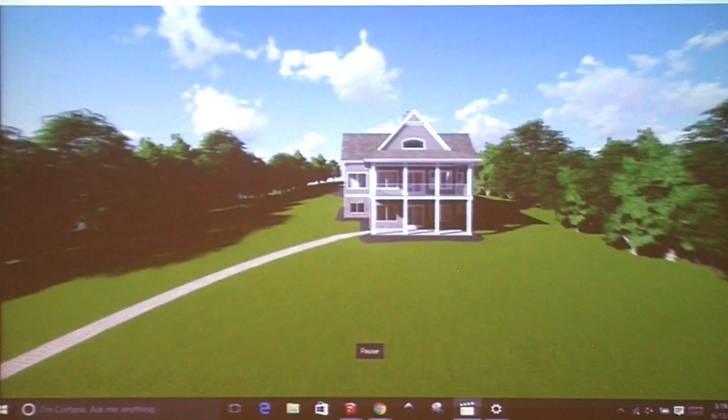And it's the method that I use to go from sort of the boring 2D stuff and get down to where I've got something I can show my clients. That's the same house model. This is a lake cottage that I created just for this, to have a sample file, because I needed something smaller. Most of my homes are pretty good size.

But everything is modeled, everything is estimated - siding, stone, gutters, downspouts, the columns you see, the asphalt, the mulch beds, even that dock coming around the corner is a component in there. The patio, the decks - you go inside, there's down to the outlets and switches in the house. So it's pretty thorough, but it is a large file.

And I also realize that it's probably farther than most of you would want to take it, and it may be kind of crazy, but it's there. It works for me.

Some of the basics before we go into it - I'm going to be talking about some of my favorite extensions. If you were in Basecamp, I was in Basecamp too, and I learned a lot. You probably saw and heard of a lot of good extensions and maybe got some on your stick of knowledge. But you'll be hearing me talk about some of my favorite plugins, and some of those guys are here that are the developers. When I got into doing this development stuff, I realized how brilliant some of the guys in this community are. So we'll be talking about some of those plugins, extensions, keyboard shortcuts.

How many of you guys use keyboard shortcuts? Most of you probably. There are some favorites that I use all the time, like hiding rest of model, so I can get rid of all the stuff around because I do a lot of groups, and if you're not doing groups and components, you should be. Paste in place, hide geometry, that kind of stuff.

Another thing is collaboration. As a home builder, I collaborate a lot with other trades so that I don't have to do it all. My surveyor will do my topo analysis. He'll go out and shoot the grades, and he'll provide me with my contour lines that I'll use with SketchUp tools and some plugins to create my site models. I use that over geolocation because it's the accurate site. I live in a lake community, and sometimes the topos are way off.

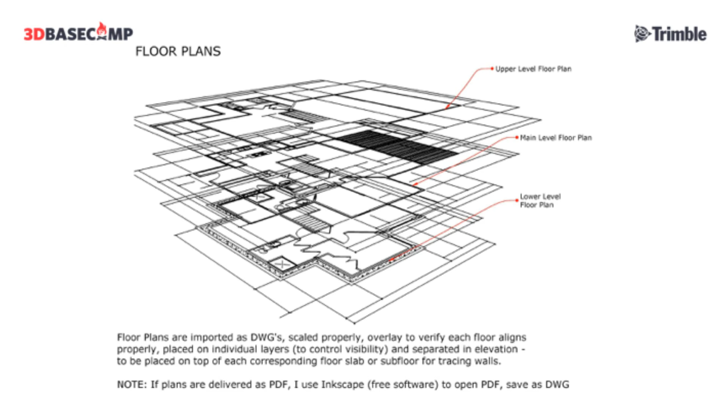Okay, so we'll jump into it. The first thing I do is bring in my floor plans. A lot of times I get PDFs as a builder. People send me, hey, need an estimate to build this house.

I'm also a designer, and if I'm designing it, I'm either designing in SketchUp or using SoftPlan, which is a parametric program. I still use it, but I like SketchUp because I get all the detail I want. But I might design in that program, then bring it over as a DWG.

But how many people have tried to get a PDF into SketchUp? All right, so I love PDFs, but I want to get it into SketchUp. In SketchUp Pro, you can import a DWG or DXF.

So there's a free program I use called Inkscape, I-N-K-S-C-A-P-E. It's a program I downloaded off the internet. All I do is open up the PDF, save it as a DWG, and close it. Then I'll bring it into a clean file in SketchUp and use cleanup on it.

I make sure I get rid of all the layers in there that I don't need, erase the geometry I don't need, and then put all of it in a group, all on layer 0. I always work in layer 0 — just don't toggle down to one of the radio buttons to work in a different layer, because you'll regret it.

You'll think, I'm smart, I'm doing all this because I'm working in this layer. Then you get a phone call, come back, and you're still doing that, and everything's on the wrong layer. You can't find it or whatever.

So I put all that on layer 0, and in my folder structure I usually save that as lower level floor plan. The next one, main level floor plan, upper level floor plan.

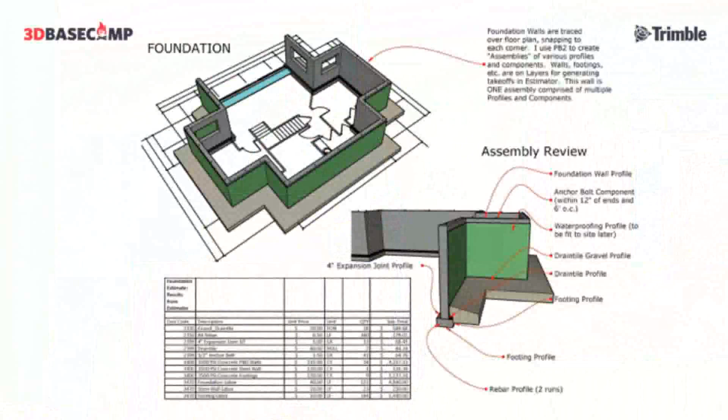Then I'll do the second floor and bring it in, and I'll separate them out by 10 feet just as an arbitrary distance to start with. Later on we'll be moving it, putting it right on the floor we're going to be working on. So after I've done that, I'll do the foundation.

I use a plugin called Profile Builder 2. Is anybody using that? That's it? Dale Martens is here, he's got his booth here. It's an awesome plugin — it's like the Follow Me tool on steroids.

Profiles can be lumber, baseboard, crown molding, it could be anything—any piece of geometry, any profile. It could be a DWG of a crown molding that you've downloaded, and then you can use that as a profile and just start tracing it around the room as you need it. Lately, the latest version has assemblies.

Assemblies give you the ability to combine profiles and components and put them into a wall assembly. Like that foundation wall you see, that's got a 10 by 20 footing, that was a profile—I've got 2 runs of rebar in there. You don't have to do that, but I did. Then there's a foundation wall, 10 inch by 9 foot, centered on that. I've got an expansion joint going around the inside, drain tile on the outside, gravel around that, and waterproofing around that which I later fit to the grade. I've got anchor bolts within a foot from the end and every 6 feet after per code, and that's just a component it puts in there for me.

What you're seeing in the back in the walkout is a stem wall—you're seeing some foam insulation there, but that's a stem wall in the back. So that's just 2 sections of geometry that were created pretty quickly because I'm literally just tracing over the floor plan.

This is where I use a method I'll call lineal groups. All the random 2x4s you're seeing, 2x6, the headers are 2x10s—all that was done using Profile Builder because Estimator will read that lineal footage. I don't care how many lineal feet of 2x4s I have in the house, I don't care how many 18¼ inch cripple studs I have. I just want to total all that up and divide it by 16 because I'm ordering 16-foot plate material. So I want to be able to get the data out of that—I want to see it, but I want to get the data out of it.

So a lot of this becomes a disciplined method, because to get the results that I need to get, I have to be disciplined about modeling it.

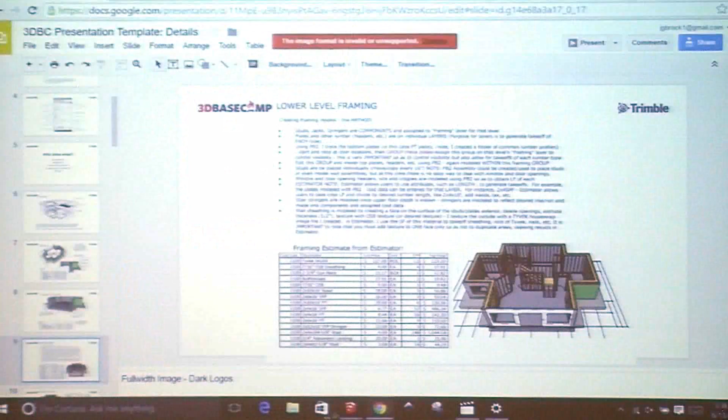So let me do a little quick thing to bring up another model here. This is a clean version of that, and this is Profile Builder over here, and this is the assembler.

Let's say I've got that foundation. Since it's open here, it's not fitting because of the screen resolution, let me see if I can scroll down. Here's a little button that starts drawing this stuff.

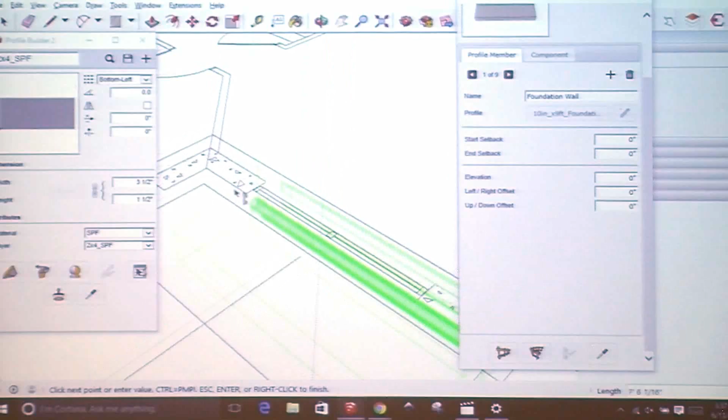So you see that one simple action of clicking to start, and you can see it being extruded as I go. I'm just going to go around the perimeter. I'm going to stop right here so I'm not taking up time. That one simple action created all of that.

So when I'm doing my framing, I'm going to pop over here off to the side. This one's ready to frame, okay? And I'm using a treated plate on the bottom, so I've got a little library over here. He gives you a whole bunch of profiles that come with it, but I created my own library for everything I use, from lumber to interior trim to exterior trim to footings and foundations. So I've got this 2x4 PT as my treated lumber.

So I'm just going to start drawing on top of it, and my laptop is seizing up on me for some reason. So the assemblies are one thing, the profiles are another, and there's two separate menus in there.

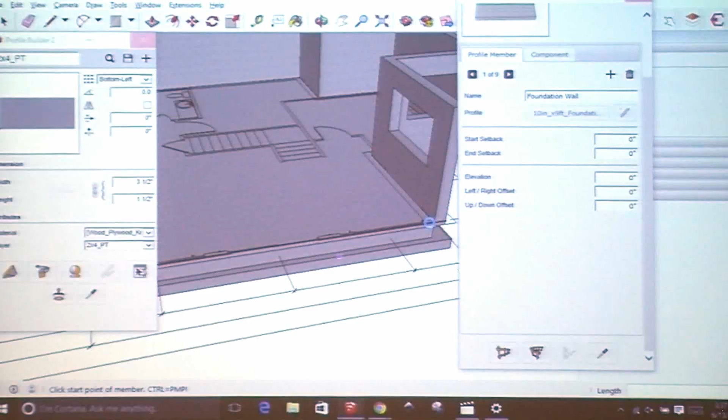But in theory, if this thing ever wakes up, I draw the bottom plates first, starting and stopping at doors. All right, then let's go ahead and do one.

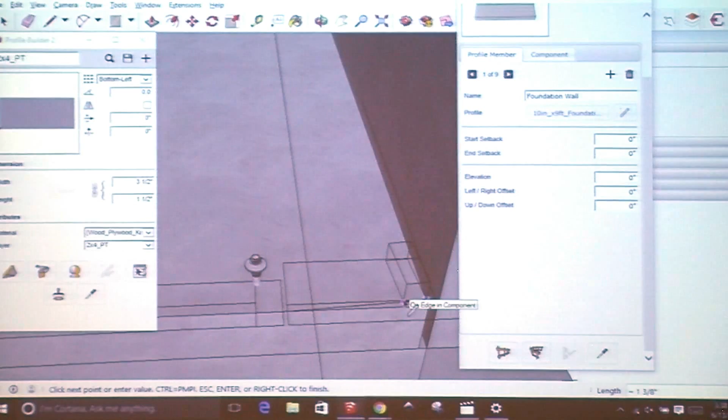I'll be flying around here with a 3D mouse, so if you see it kind of going smooth. Everybody have a 3D mouse? Anybody? If you don't, get one. I won't work without it.

I refuse. All right, so I'm going to just go and start and stop at my doorways. And you can see I got my anchor bolts in there, and I got my treated plate. It's just that easy. I'll start off on the other side, skipping where that window is. I got a door that I just skipped past.

So I'm going to then group these two by holding down Control and clicking on the two of those. Then I'm going to right-click on that and make it a group. The reason I'm doing that is because I got a whole bunch of these different lineal footage items.

And I want them on their own layer because the estimator is reading that off of that individual layer. So if you're not worried about estimating, just throw it on one layer, control its visibility, main floor framing or lower floor framing. By putting it in a group, all those layers are read individually by the estimator, but I've got them all grouped into my lower level framing.

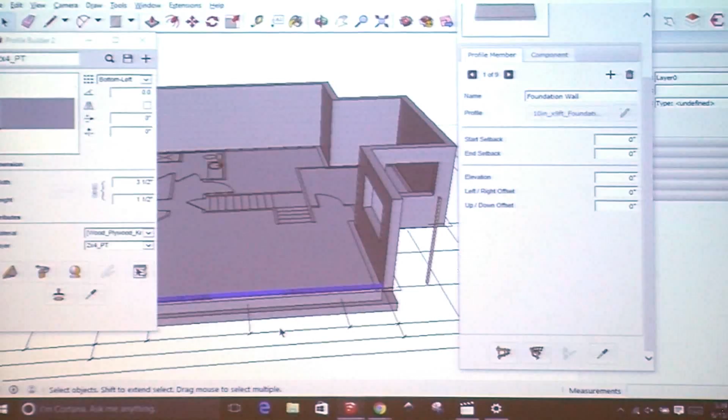So when I've done that, I'm going to double click on that group. If you double click, it edits it.

So for hiding the rest of the model, I use Shift-H. See how I can now see it close up? I don't have to worry about all the other stuff that may be behind it. This one isn't a bad example of it, but a lot of times you really need to do that so you can see where you're working.

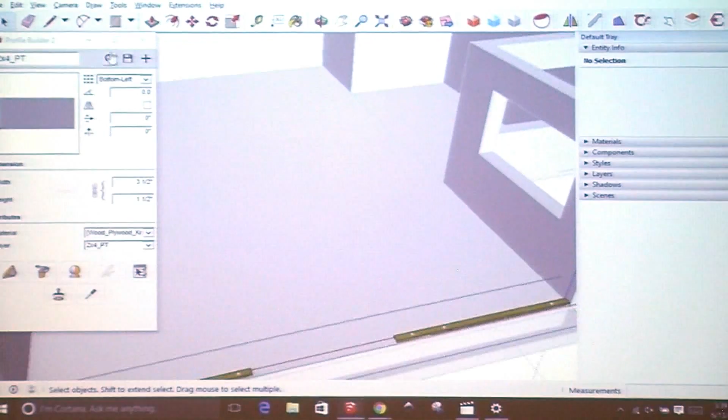Then I'll just switch over to my 2x4s, my regular 2x4 SPFs, and I'm just going to draw that right over top. Having laptop issues. So in theory, I'm going to draw that plate over top, over to the other side, and I put it right on top of this plate that's here now.

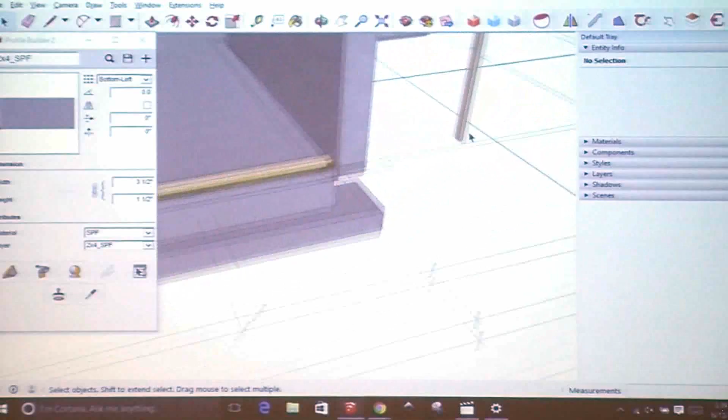I'm going to close out of that group for a second. I've got a stud. Now this stud is a component that I have in my library because it's already got my costs associated with it.

But you know, you can create a stud, just 1.5 inch by 3.5 inch rectangle for a 2x4, pull it up 104 5/8 or whatever your stud height is, triple click on it, make it a component. I like to put a little wood texture to it for realism.

And then I'm just going to move this stud over into this mix. Obviously I didn't get that plate exactly right. I'm going to double click on that group now because I'm editing the group that I just made. So I can select that plate, and I'm going to move it right on top of the top plate. While it's still highlighted, hold down Control to make a copy of that, and there's my double plates.

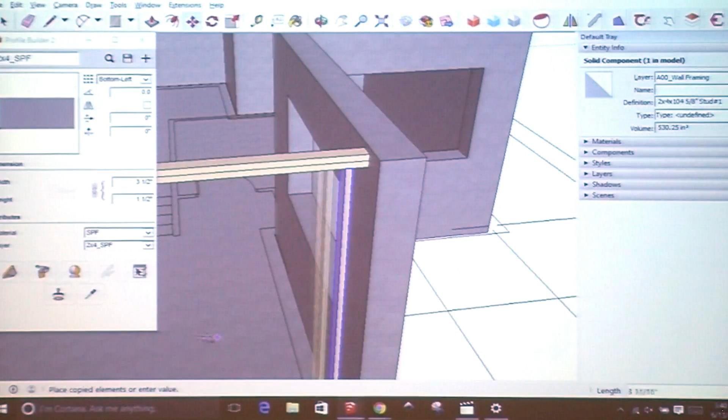And then I can take my studs and copy them 16 inches over, times 15 or however many, taking out for windows and doors and things like that. It's not a parametric modeler, and I haven't found anything out there yet. I want one. There's a thing called House Builder that's been out for a while, but it's just mass modeling, and I can't make them components, so I don't use it.

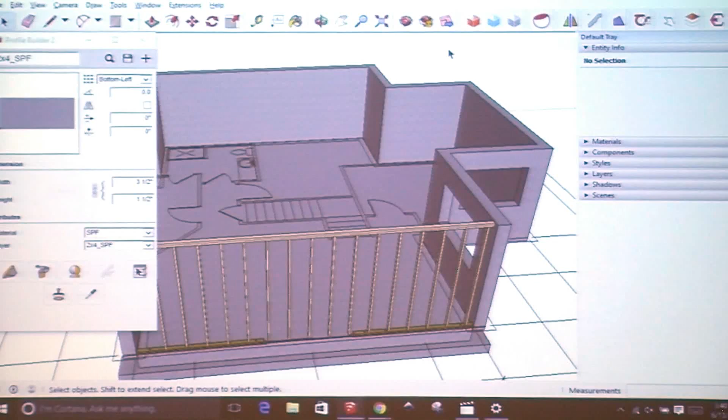You could do assemblies of these studs using the Profile Builder tool we talked about. You could actually tell studs to be every 16 inches on center and just draw from one end to the other, and it'll fill them in. So there's a lot of ways you can do it. I tend to just do these studs one at a time. I put my corners in and tees in. It doesn't take me very long to frame them once you're used to it. It may sound daunting, but it's not that bad.

So studs, jacks, the stringers you're seeing, the stair stringers - those are all components, and I assign my pricing to those. The plates are all done in that group we talked about so I can get my cost for that. So I'll go through and do all my framing on this lower level you're seeing here, and I've got all my materials off of that as well.

The main floor system in this case is TJIs. Most of the time I'm using floor trusses, but for this simple small model I use TJIs. TJIs are truss joists - you've got a top chord and a bottom chord and a web stiffener.

You can model those in SketchUp by simply modeling your own and push-pulling them, or you can use Profile Builder and do the top and bottom profiles and the web profile and draw them. So the perimeter was done with a rim board - that's an actual TJI rim board going around the perimeter.

And then the joists I'm putting in here, I put them in, actually measure them, and then name them by their length and copy them. The reason I measure them is because if it's 14'6", I need to order 16-foot material. If I just give my lumber yard total lineal footage, I don't know what I'm going to get.

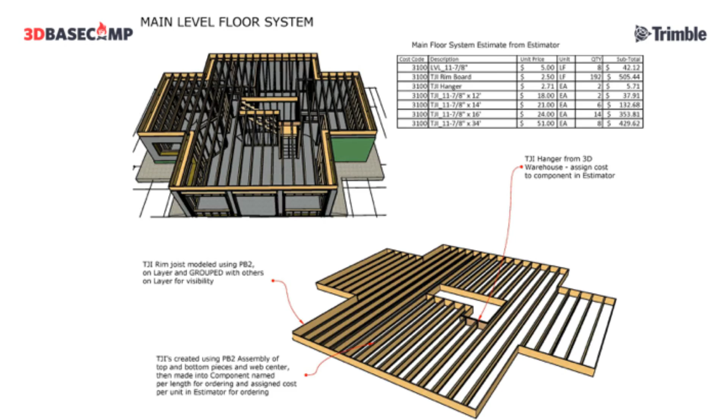The next thing I do is my subfloor, and all I'm doing there in native tools in SketchUp is taking my line tool and drawing a perimeter, just like I did with that slab. I'm literally just tracing that rim joist I had in there to create a face. But before I pull it up, I cut out for that stairwell.

You've got a stairwell in there, and I don't need flooring there because my stairs are going down. So I'll literally trace my stairwell and delete that face. I'll even go in where the toilets are - the toilets are in on the drawing. I'll offset from the back of that wall.

It's 12.5 inches to the center of a toilet drain. I'll offset with my guide tool and tape measure tool, pull it over 12.5 inches, then do another guide coming from the side wall to the center of that toilet, and draw a circle. I usually do a 4-inch diameter, 2-inch radius, and trim that out, because if it's sitting over top of a truss, I'm going to have a problem - you cannot cut trusses. So I'd rather lay that out now, and if you're an architect, lay it out so your guys aren't doing that and then having to cut trusses and get in trouble and that sort of thing.

So I work my floor systems around that. I'll do my floor system first, but then go back and tweak it. And if I'm working with my truss manufacturers, I let them know of those center lines to make sure they space them properly. Then once I've got that face, I pull it up 3/4 of an inch because I'm using 3/4 inch Advantech subflooring in my market. Triple click on it.

I give it that nice wood texture, that OSB kind of texture that SketchUp has in it, and put that on my layer called subfloor. Then my pricing is associated with that subfloor. So in Estimator, I'm using the area of that subfloor and dividing by 32 for 4x8 sheets.

So that's my subfloor. Then I'll take that main floor plan and stick it right on top of the subfloor, just like I'm chalking the walls. When I go to my main floor, it's the same theory. I'm using those groups, lineal groups, where I'm doing my 2x4s and 2x6s and 2x10s, all my random lumber, studs or components like we talked about. The sheathing you're seeing there, the exterior sheathing, I'll pop into the model.

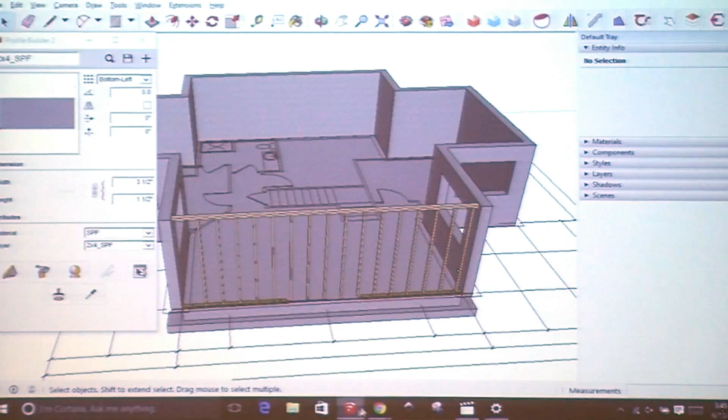Let's get to the correct one. Let's go into the basement framing here. I'm dropping back in. I didn't show you before, but you can see my stair stringers are in there.

They're components. The sheathing that I put on there, I literally just use the rectangle tool and create a face from corner to corner. I'll draw a rectangle across it to create that face. I'll then trace the window openings and delete that face that was created. I'll trace the door opening and delete the bottom edge that was down at the bottom, and then that creates a hole in each of those cases.

So then when I've got my sheathing, there's a couple different ways I'll do it. Sometimes I'll go wall by wall. You could always do all those faces and then use a plugin called Joint Push Pull. Is anybody familiar with that? It's a separate plugin you can get, free like most of these things that seem to be free. You could pick multiple faces, choose the depth you want to pull it, and it pulls them all at the same time. So I use that on my roofs, and we'll talk about that.

So I'll pull that sheathing out a half inch. And I usually will triple click on it and give it all that OSB texture like I'm using, because I use OSB sheathing, and put it on that group called sheathing so I can control its visibility.

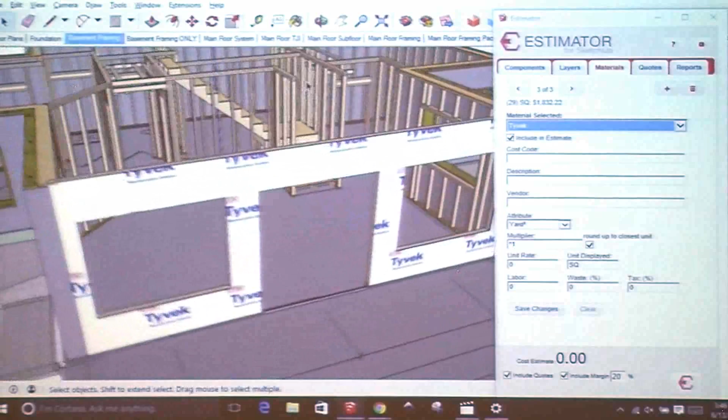But then I picked up this Tyvek image off the internet because I wanted my clients to know what this thing is going to look like. And in Estimator, that becomes a material. So if I clicked on that and chose the material, you get a drop down of everything in that selection. Tyvek, you can see I've got all these different costs associated with it. I'm using its square footage to figure how many sheets or rolls of Tyvek. I'm using its square footage divided by 32 for how many sheets of sheathing. I'm using its square footage divided by 900 for how many gun nails I need. So you can add as many of these things as you want.

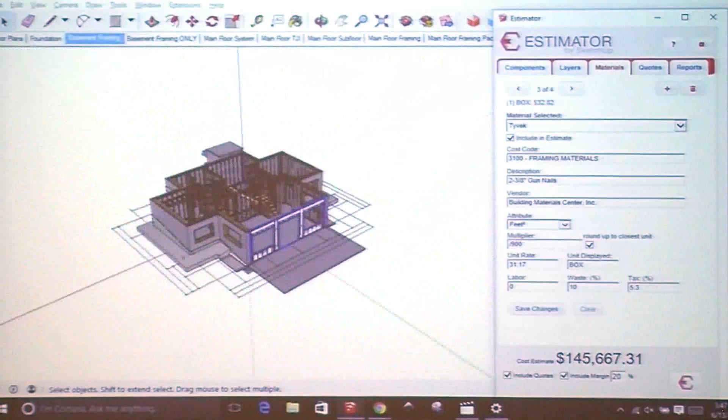Ask you a question? Yes, sir. So the back side of that sheathing is the OSB texture, which is reading the sheathing, and the front side is the Tyvek? Well, you could take it to that level. When I first did it, I had a wall sheathing material and the Tyvek, and that's getting a little anal. You don't have to, you can combine that. You've got to make sure - I'm glad you said something - when you're doing this and using the materials part of Estimator, only apply that texture to one face. If you just triple clicked on that and applied the texture to the whole thing, you're going to double your results plus whatever little bits you got going around the edges. So thank you for saying that, because that's very important. That's what's happening there, right? Yeah.

Let me get the sheathing from the back. See if I fly on the inside, you can see the sheathing. That's what it's counting. If I double click on that to hide the rest of the model, see it's sheathing.

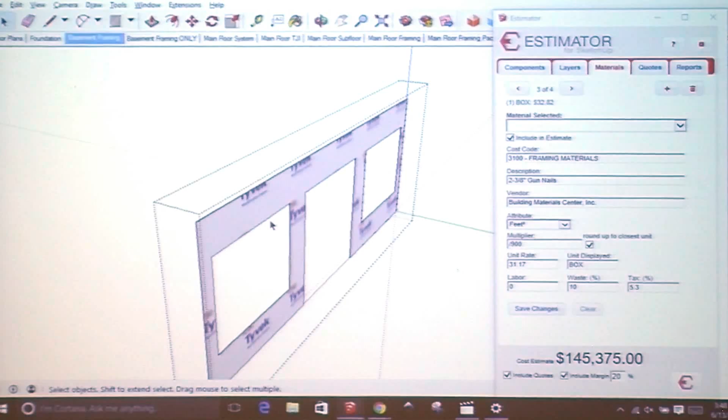It's the OSB texture everywhere except for that front face. If I wanted to be really thorough, I could have painted the inside of that, but you're adding waste in there so you can accommodate for those sorts of things.

That's how I'm doing the framing models, and I can step through it in here. I sometimes will just isolate the framing materials on that level, select everything, and then run a report, and that's my purchase order.

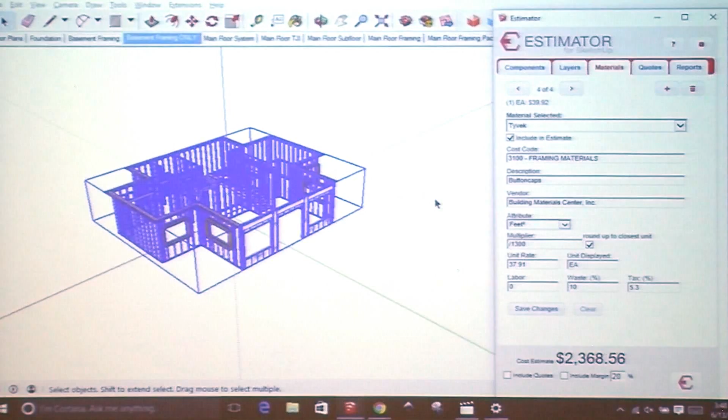Let me cut off my other items in here. So that's $2,000 worth of lumber in there. But I can run a report on that and make that my purchase order.

So my main floor system, these are the TJIs that we talked about, and the rim joists and so forth. Again, I just measured, used a tape measure tool, measured from end to end. It's 15'5", so I'm going to order 16-foot material and trim it in place. But that's what I'm going to name it.

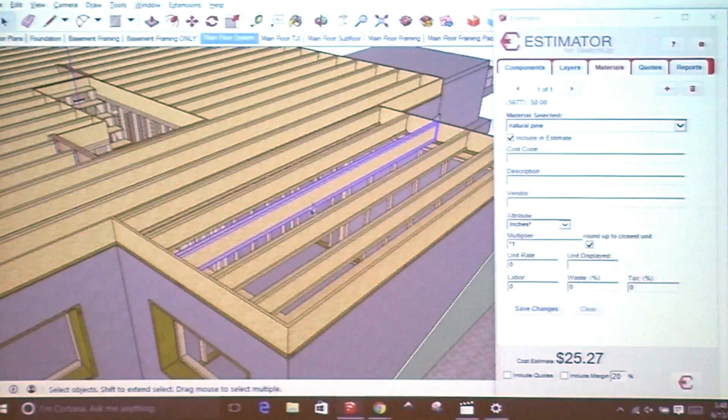So if I clicked on that one joist, it's $25. If I right-click and say Select, All Instances, it's going to select all the ones that are in there so I can get an idea of how many I'm going to need. Plus, you can also see that in Entity Info over in your main tray.

There's TJIs alone because I'm ordering those separately. It's my subfloor. You can see where I've got the holes cut out for the registers from the HVAC guy. Main floor framing.

Main floor walls, again, done the same way. If I was to double click on one of these plates, hide the rest of the model, you can see all that random lumber. You can see my headers. I've even got OSB sandwiched in the headers, so it's little rips of OSB, and it's calculating all that too. So it's, again, whatever level you want to take it.

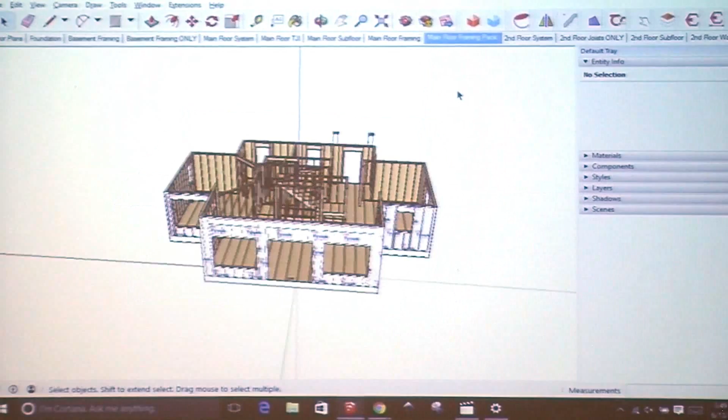Second floor system. The second floor system of this house is just 2x10s. In this case, I used Profile Builder to trace around that perimeter, and then Estimator is going to take the lineal footage divided by 16 for how many pieces I'm going to buy.

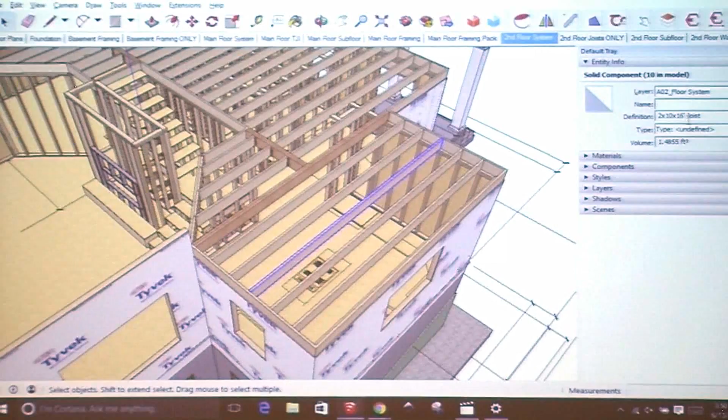But then these individual joists, I do that same sort of thing where I actually use a tape measure tool and name it by that. So you'll see the component name up in here, the definition. That's how it's going to report out.

These are some LVLs. I use a different texture to denote that. Instead of, sometimes I'll do the lineal footage thing for those for a purchase, but a lot of times I'll do them as a component so I would get the correct length ordered.

Those are those joist hangers I was telling you about. So that's the second floor system there. That's isolating that floor system.

There's my subfloor. You can see I've got that hole cut out for the toilet, so if I went down below and looked up inside there, I'm missing a joist. Don't want to be on top of a joist. You cut that joist, you're going to fail your inspection.

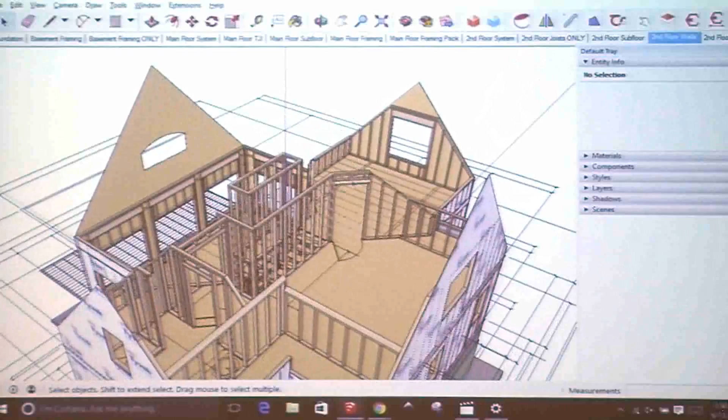Second floor walls on this house were more complicated because the walls were built under the roof. So you've got all these slope ceilings everywhere. So to frame this was a bit of a time-consuming thing, but it's highly accurate.

And I do these a lot because I want to study my headroom. I can't tell you the plans I've gotten, and then you go to frame it, and you can't get in because nobody thought about it, or maybe the knee wall didn't get built the correct height, or nobody thought about that in designing it. So that's the second floor wall.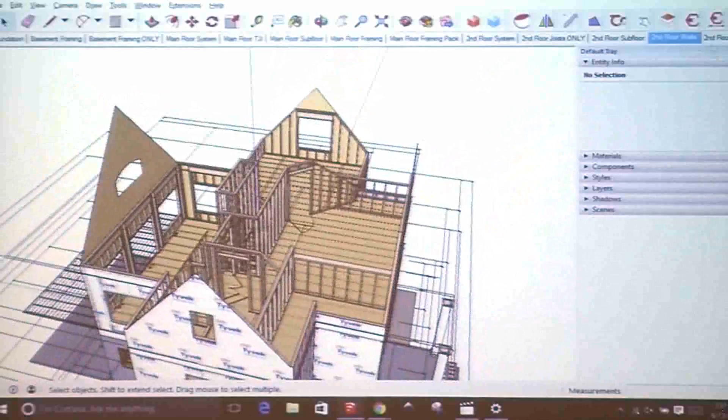The second floor framing pack was just isolating the second floor. Roof framing, I'm doing these rafters as components.

I'll model it. Usually I just model it inside of SketchUp, but I have a library of rafters, but half the time, by the time I go find that library, I could have recreated it.

So I'll start a rafter by the pitch, of course. I'll come in and maybe draw a line off that wall, go over 12 inches for my run and whatever my rise is, and close that and make a little triangle there. I'll offset using the parallel line.

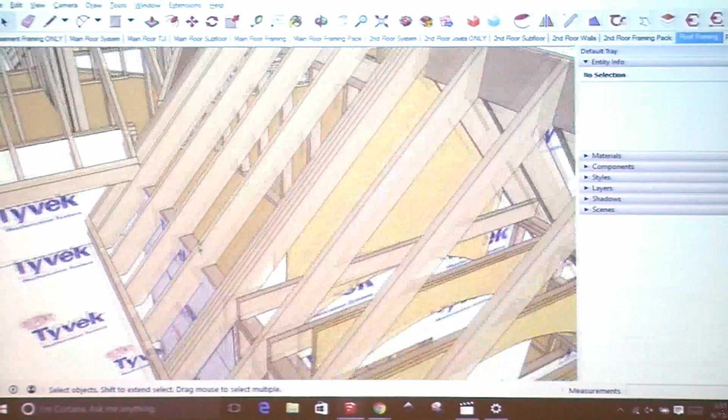Offset the depth of that rafter, and I'll generally draw just the tail of that rafter first. Then I'll mirror it using TIG's mirror tool. It's a free plugin called Mirror, available on Sketchucation.

You can mirror in SketchUp different ways: make a copy, move copy, use the scale tool, or invert them. I've just gotten so used to using Mirror for so long. I could select that rafter, choose its midpoint somewhere along the way, and it'll flip it to the other side.

Then from there, I can make it come up and meet the ridge. If that's just the tail, I'll bring it up, since it's the same component - when you edit a component, you're editing the same thing. So if I edit this one over here, you're going to see the other one kind of grayed out on the other side.

I'll just move it on up until they meet and draw a line at the point of the intersection. I'll offset 3/4 inch each way for my ridge board and trim it out. And then I've got my rafter.

I'll use the same idea where I take my tape measure tool, measure that rafter, and name it by that length. This one's a 22-foot long rafter, and then just start mass copying them. Everything associated with it is built in.

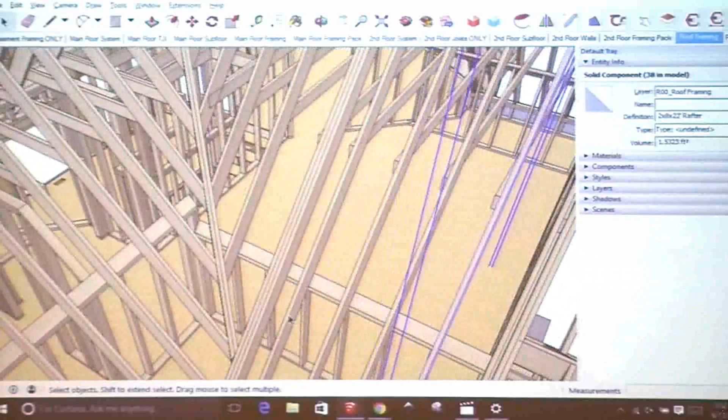So when you get into these valleys like this, it gets a lot more complicated. I'll usually create the plane on the roof first, because I'll have something to work to when that valley comes in.

Once I've got my valley rafters in there, I'll move that first rafter on over until it hits, but then I'll edit that - I'll make it unique first.

Always remember, if you're making a copy of a component and you're going to change that, make sure you make it unique. So in this case, the first time I moved that 2x8 by 22 over, move copy, and then made it unique, it named it 2x8 by 22 number 1.

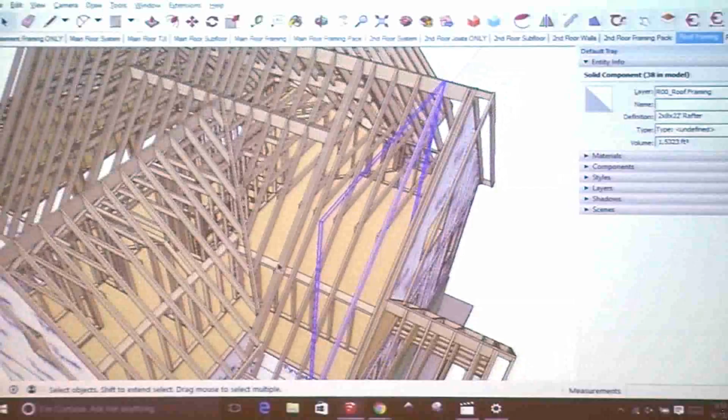I'm usually measuring that new length, then renaming it by its appropriate length. It's a little time consuming, and if you're mass modeling, you don't need to do all that. But for me, I needed that information, so I'm actually naming them to get all my material list.

So that's all the roof framing in here. They've got ridge boards. All the subfascia and other random lumber you're seeing was done using Profile Builder, using that same concept we were talking about. This is all random lumber.

I've got some furring strips in here, some ceiling joists. All this is grouped so I could get all my lineal footage data, but I can also control its visibility with a single click. So that's my roof framing.

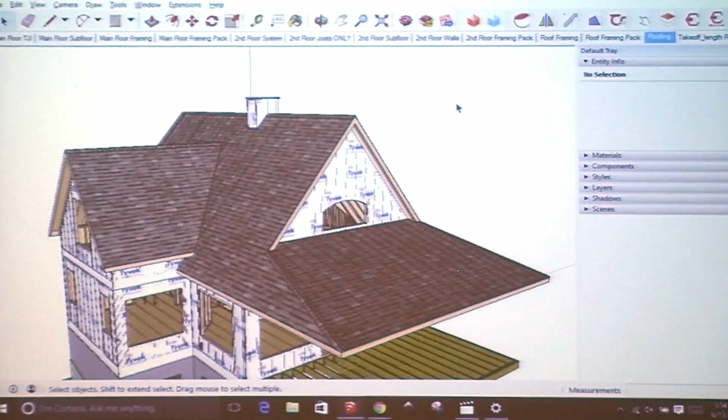Next is my roof, and what I'm doing is I'll put a skin to those rafters, a mesh, using either the line tool or rectangle tool, creating that face on each location, and trimming out where these valleys are.

I may do this as one big rectangle across, or one big face, and then do these sections and trim those out. But either way, I'm creating those individual faces.

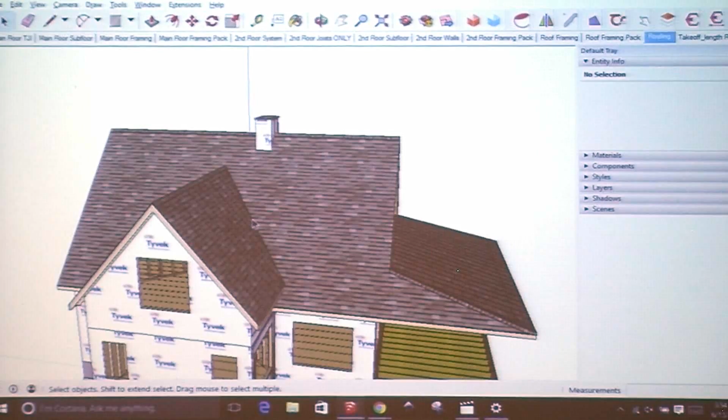Once I've got all those faces, I'll use joint push pull. I just select each one of those faces, choose a 1/2 inch in the joint push pull command, pulls it all up a 1/2 inch, and in this case I did what we were talking about with the sheathing.

The underside, I've got the OSB, or roof sheathing layer, so if I open up my materials, I've got this roof sheathing, and that's where I'm getting my quantities from, and I've got the Asphalt 18, which is the name of this shingle here. So that's how I'm getting my quantities.

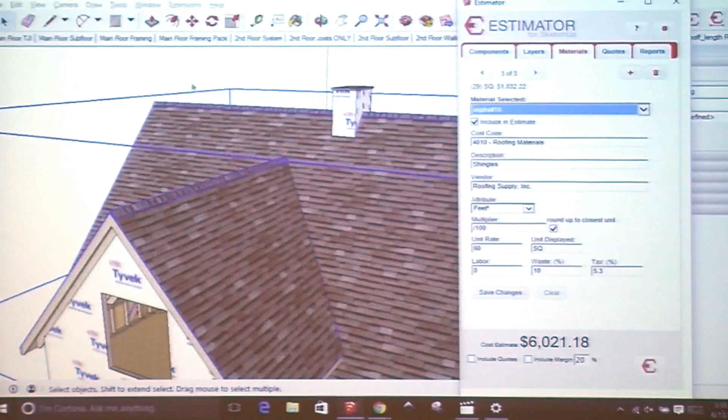But that's the material I'll use as a default for my models. So let's say somebody wants to see the price difference between a metal roof and a shingled roof - if in my library I've got a metal roof texture, regardless of what color they want later, it's a standard material I'll use.

And I could paint it with the metal texture or just use material replacer. If I've got that other material, I can replace the asphalt shingle material with that metal roof and instantly see the price difference. So when somebody wants to know the value or cost comparison between the two, I can do it really quickly while they're sitting there in my office.

So the ridges that you're seeing in here, I did the same sort of thing. I used a joint push-pull and pulled it up about 3/8, just to give it that realism. You don't have to do that if you're just looking at a general roof. We're down to the details, so I'm just showing you the little things I do here.

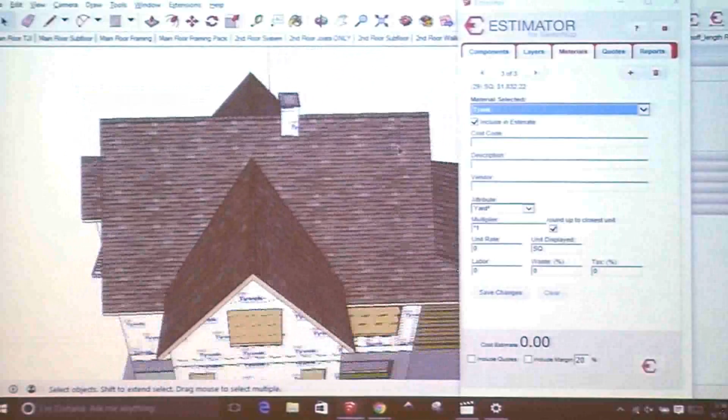Now, to get information from that, I've got another plugin that comes with Estimator called Takeoff Length, and it lets you do collections of lengths of things. It could be walls, ridges, valleys, starter courses, hips. You get these little collections, and you can literally hover over an edge in your model, it'll change color, click on it, and it just accumulates those lengths.

That may be all you need. You may not want to run an estimate on it, but you want to know how many lineal feet of exterior walls I have, or how many lineal footage of footings I have. So you could use that quick little tool to create those collections.

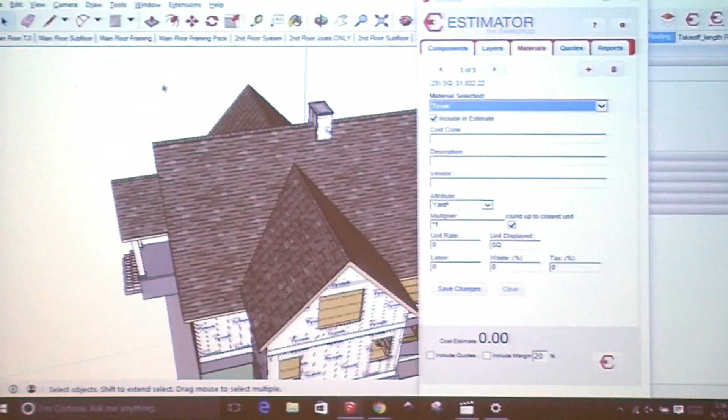It's free with Estimator, also available on the website. All right, so when I've got my roof on, I'm going to go back into our presentation here.

So we talked about the second level framing. Decks are done sort of the same way. The joists are components. I may do the outer band using Profile Builder just to get the outline of it and get my lengths. But my joists, I'll just use the green pressure-treated material that comes with SketchUp. And I've got joist hangers in there, not only for realism, but for my quantities, for my order.

The columns you're seeing down there are some columns I use a lot. They're structural 10 by 10 columns that I've used from job to job. It's a component, already got the pricing associated with it. And when I move it into a new model, I just adjust, make it unique, and adjust the height as needed.

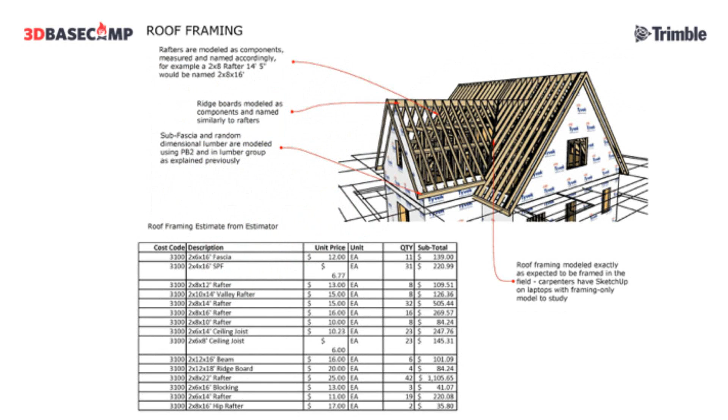Roof framing, we talked about briefly. Roofing, I talked about how I did that. Any questions on the roofing? I know I'm flying through some of this stuff.

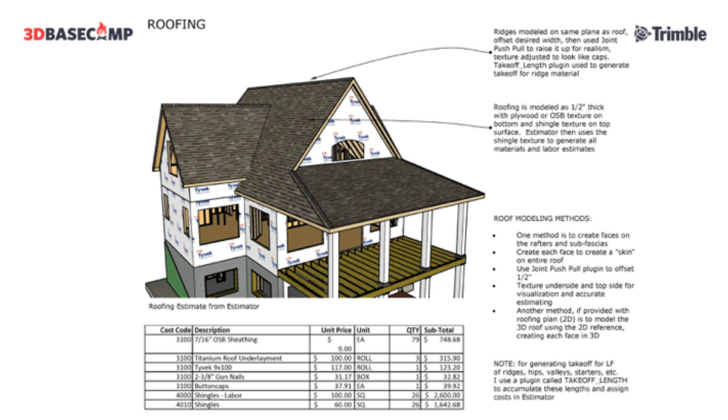To make it unique? No, you can just right-click on a component. So if I took this joist that's in this deck here, that's a 2 by 10 by 12 joist, I'm going to say move, hold down Control, and move it out of here. If I just jumped in there and started pulling that, see how they all pull? I don't want to do that, so I'm going to undo it. But if I go through and click on that component, right-click on it, and make unique, then when I click on it, it changes just this one.

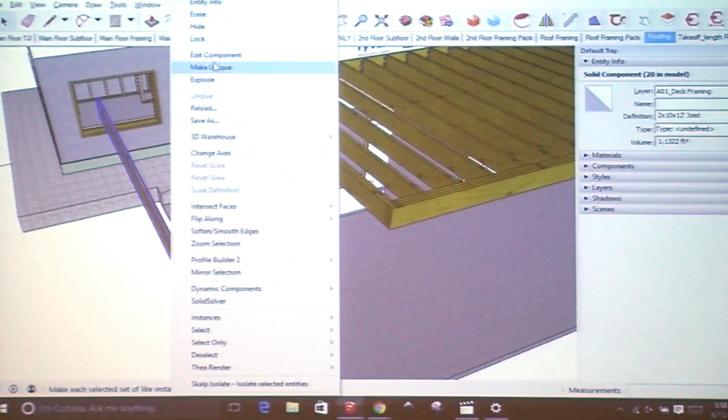So I'll move this to the next location. Let's say the deck resets back 2 feet or something. I'll copy it over, push it back to fit, and then come in and rename it. So in this case, you see how it was named? If I click on it, it named it number 1. So I'll come in there, and if it's a 10-footer now, I'll just override that. But it has to be a unique name—you can't have a component with the same name and change it. It has to be unique, and you'll get yelled at for that too, because it happens to me a lot.

Since you've used the wood texture on this, do you have that set as 0 so it doesn't conflict between the component price and the texture price? Yeah, I just don't assign prices to the texture, so you can do one or the other or both if you wanted to. But I don't do textures to something like that because I might use that texture elsewhere, and then all of a sudden I'm going to have pricing showing up for something that doesn't exist.

Yes, sir? You are using that—it does that for you. Yeah, if you did joint push pull, if you looked at it, it's going to go right up to that peak. It will do some weird stuff every now and then, so I'm a little leery of it sometimes. Sometimes it works great, sometimes it'll give you a face that you can no longer, it'll smooth it. Some of the SketchUp guys could probably educate me on that, but I've had problems with that before.

Right, good question - they're unique components of that 2 by 10. But I'll name them individually so it'll be a unique name, but then over in Estimator, you have to add a description. The reason I make you add the description is because you may have some that are 15.2, over here 15.8, over here 14.9.

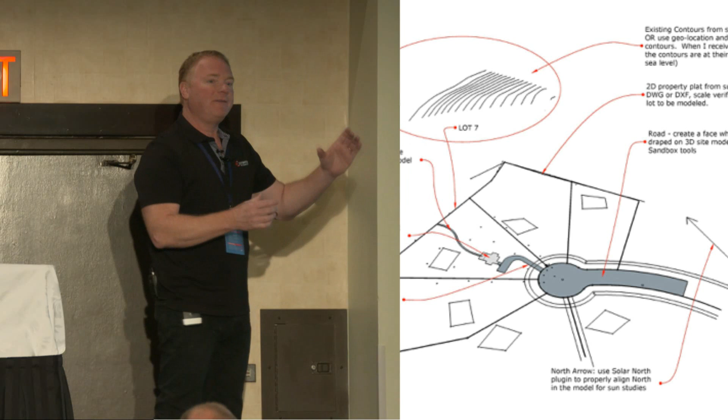You'll see the road - I actually made a face towards the lot because I didn't need the whole development. You could do the whole development if you wanted to. But I create a face, and I'll make that a group first of all, so I don't stick to anything.

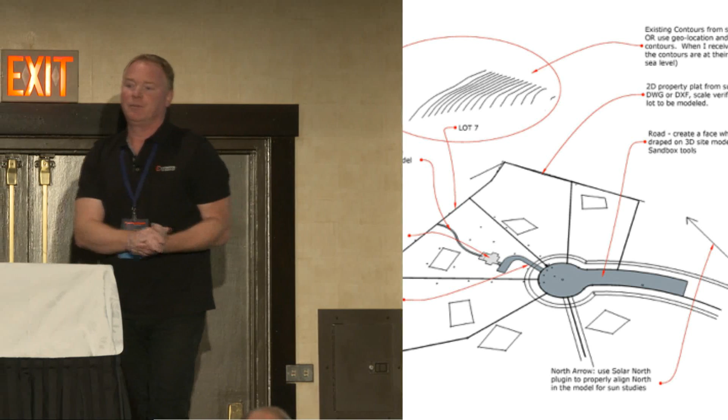It's very, very important to make groups, because otherwise, if you start monkeying around and drawing a rectangle over top of something, and you go pull it up, all of a sudden you see all these other things coming up with it because it's sticking to it. So make it a group and it's unique, and you can draw on top of it without affecting it.

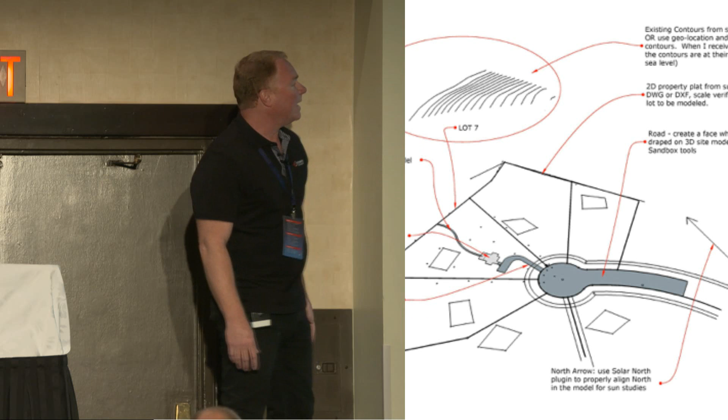So you'll notice the house was placed - there's a little outline of the house. And on top of that in 2D, since it's easy to draw in flat 2D, I just traced a driveway. It's not the prettiest driveway in the world, but it's for an example. There's a driveway there, there's a path that goes down to the dock. Later on, you'll see how I do mulch beds and things like that around the house, and then how we drape it onto the property.

But for starters, this is what I'm typically going to see. Oh, what is that? What are your boxes?

Those boxes that you see going around there are the drain fields for those lots. I have septic systems in this neighborhood, so yeah, you probably are not used to seeing those. But that's just the 2D property.

I'll create a face for the road, a face for the driveway, a face for that pathway. And then in SketchUp - we're going to be talking about this later - in the sandbox tools, you can take that face and raise it above your property and drape it right down, and it's really, really cool. I'll show you that. So this is what it looks like when I first get it.

So what I actually do is, if any of y'all took Nick's course, he does separate models - he'll have a site model and the house model, and he uses the house model as a reference.

He doesn't edit it in there, he fits the house to the property. I go the other way around, I fit the property to the house, because I don't want to monkey around with my red and green axes. If you go to change something and you're on some weird angle, I just stay away from it. So I'll rotate the house to fit.

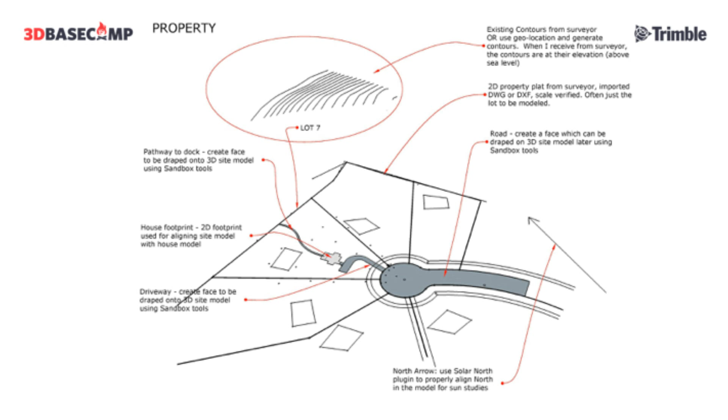Back in that previous slide, something I didn't point out is you can see the north arrow over there on the side. SketchUp guys, correct me if I'm wrong, but I use a plugin called Solar North, and I'll actually set that to be north, because I do sun studies for my clients. The Solar North plugin seems to work on this one, because when I did it, the sun comes exactly in the way that I thought it would. So I don't worry about north when it comes to my properties, because I can correct that.

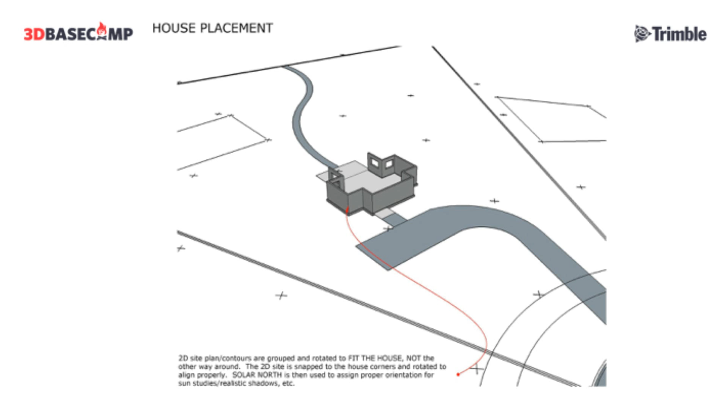So I'll take the 2D footprint of that house that we had, and I'm going to fit it. I'll take a known corner, snap it right to the corner of the house, and then rotate. That whole site that we saw before, I'll take the contours and the site, and group all of that, so that when I move the site to the house and do all my rotation, everything associated with that is moving. If I did just the bottom part and didn't do my contours, I'm screwed - I'd have to go back and start over again. So I'll get the house placed where I want it.

Then you can see those contour lines. Those contours I put on a separate layer called existing contours, because my goal is to do the existing site, and then the proposed site, and compare the volume of the two of those.

It's an arbitrary volume, but I need to know, am I hauling dirt in, am I hauling dirt away? There's a plugin that TIG has called Cut and Fill. It's really cool if you get into doing site modeling, you landscape architects - you can have two sites, as long as they started out the same and you're altering the two, it'll compare them and give you the cut and fill ratio. But you can also just use the entity info and the volume, which is what I'm doing here.

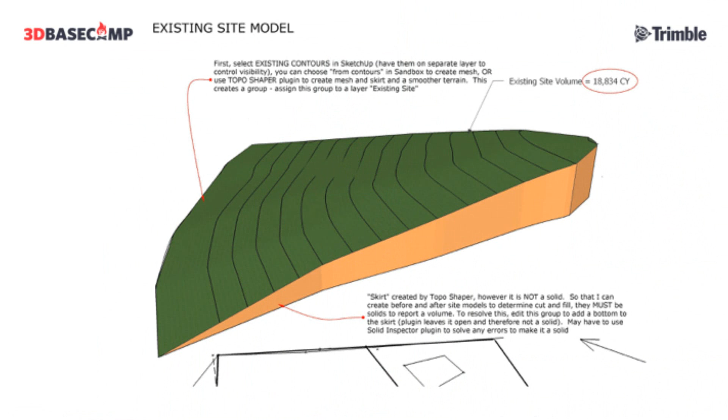So what you're seeing was done using a plugin called Topo Shaper. Topo Shaper is a free plugin. I don't know if it's on the Extension Warehouse - I know it's on Sketchucation, I think. Somebody can help me with that. But with Topo Shaper, you can use the sandbox tools.

Let me drop back a second. You could have selected those contour lines and used the sandbox tools that come with SketchUp, and just say from contours, and it'll spit that mesh out for you, or a contour for you. With Topo Shaper, it's a more simplified mesh to work with, and it also puts that skirt you see around there, that brown skirt.

But it's not a solid. So at that point, if I was to flip that thing over, you'd see it has no bottom to it. So I usually end up exploding that so it's all loose geometry, and then I'll trace a line somewhere along the bottom to make it close up and have a face at the bottom. Then it's a volume. If you look at entity info and you don't see a volume reported in cubic feet, it's not a solid.

And you're going to run into this a lot. If you're ever wondering why it doesn't report a volume, even when everything looks closed, there can be one errant piece of geometry somewhere. I don't care if it's a needle in a haystack, because sometimes it is - when I do these things, there might be some little teeny line that got drawn somewhere that I couldn't see. It's a needle in a haystack.

There's a couple of different plugins. ThomThom, the genius who's here, created Solid Inspector. He's got Solid Inspector 1, then he came out with Solid Inspector 2. Solid Inspector 2 sort of automatically fixes some things. I still use Solid Inspector 1 because sometimes I need it - it helps in certain applications. What it will do is if there was a teeny little line in that group, it could be just a line inside that I'd never be able to see.

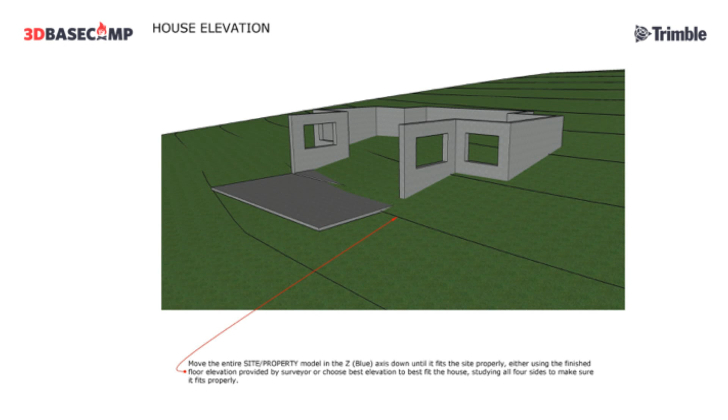So then I'm going to choose my elevation. If I'm lucky enough for the architect or the engineers to give me my slab elevation, that would be awesome. But most of the time it falls on me, and that's a permanent decision I'm making. So I do these contour plans, these site models, on every house I do, because it's going to tell me if I need a sub-foundation, if I need to haul in dirt. I get really, really accurate concrete estimates instead of surprising my client with a change order because, oh, that sub-foundation was $10,000, I'm sorry.

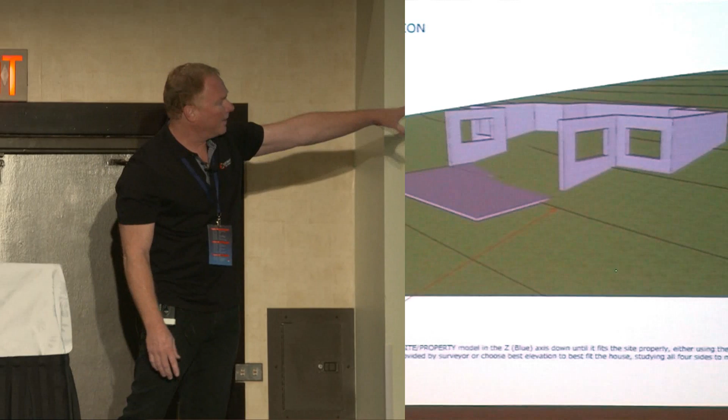So I'll actually move that group that we saw, that I put that skin to, and I've got that mesh on that site, and I'm going to move it until it gets into the house. I've not done anything to the house - that foundation is right where it was when we started. So what I did is I picked a happy medium in there, and you can see it's almost right on grade. It's not quite fitting contour perfectly, but there's a little bit of cut on that little right side, and it's almost dead on the left side. The patio is sort of sticking up out of the ground a little, so I'll have some fill there. On the front, it's kind of a steepish slope coming down, so I want positive drainage. So I've just found that little happy medium, okay?

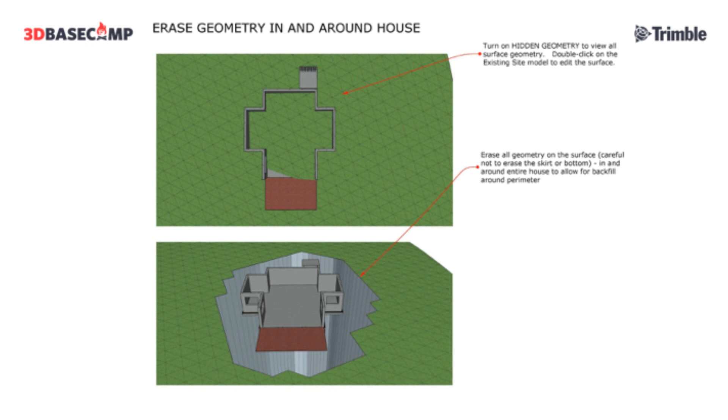So now that I've got it placed, I've got a bunch of dirt in the way. I've got to excavate, just like I would building a house. So what I do is I turn on hidden geometry - I've got a shortcut for that, but it's also just under View, Hidden Geometry. And you'll see all those triangles, that's the mesh of that surface. It's important that we can see all those individual faces, because if we didn't do hidden geometry, that's just one big smooth contour and we can't edit that. So we'll turn on hidden geometry.

Then I'm looking down on it in this slide. I cut away all the geometry, erase all the geometry under and around the house as far as I need to be able to backfill to - hide it or delete it. Delete those faces. What you're seeing, that blue on the underside there, that's the skirt that we saw, the reversed face of that. That's why you're seeing the blue.

Now, I learned something in boot camp from Daniel Tal. When he does that, he uses a plugin which I already have, I just didn't think to use it for that. It's called Tools on Surface. Anybody heard of Tools on Surface? It's a great little plugin - when you're working on site models, you landscape people, get it. It's free. What it does is kind of traces a circle around that when you're drawing a line. If you started drawing a line on a surface like that, it's going to want to go out on a proper axis. Tools on Surface will actually draw that line right on top of whatever surface you're working on. I don't know how they do it, but it's brilliant.

The way I did it here was I just erased all those triangles around there. It took me a little bit longer, but it did the same trick. So now that I've erased that, I certainly don't have a solid anymore because I have a big gaping hole in the ground, and the house is just sort of floating there. But what I want to do is get my final grade so I can show everybody what this thing's going to look like with the final grade. So the way I do that, looking at it from the side, I start drawing a line around the perimeter where I want the grade to be, where my backfill is going to be. A little trick I do is I'll draw the first two lines, then select those two lines and make them a group.

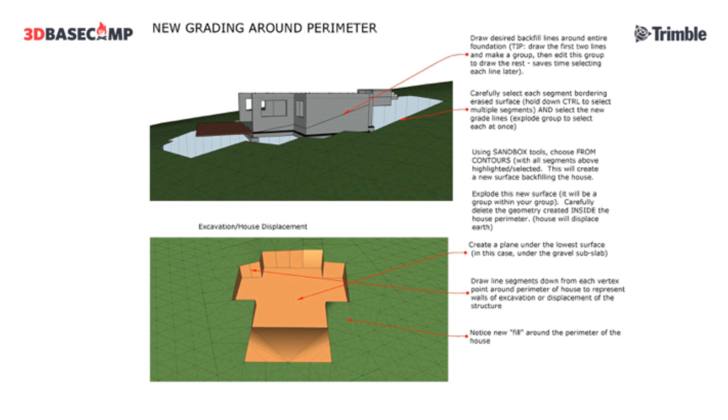So what I do is draw a plane, just a simple rectangle up to the underside of that thing, just to get started. Then I cut it all off so I can just see that plane and the rest of the site. Then I draw a line at each one of those vertices that you can see.

I'll start at a corner and draw a line down, holding the arrow key so it goes straight down along the blue axis. I'll hold Shift so it's locked into that position going down, then infer that little rectangle I drew at the bottom of the gravel so it hits that point. I'm not worried that it's not all the way around yet - I'm just inferring that point.

Then I'll go to the next vertices over, draw down, infer that point, and connect it. I just keep going around connecting it until I get that little skirt, if you will, or the side walls of the excavation.

So it really doesn't take that long to get the final grade and displacement of the house. All right, so what we've got here is this cut and fill analysis. You've got the proposed site at the top, and you've got that initial existing site. I just look at entity info - I could have used TIG's tool, but I was kind of breaking it down to show the math.

So you've got the existing site volume, and again that's just an arbitrary volume, just a chunk of earth. Then you compare the two, and it's a difference of 42 cubic yards that either need to be hauled off, or 42 cubic yards of dirt is maybe 3 truckloads.

I could spin that out over here, dump that over there, move that over there and spread it out. But if it had been a big number, that's a red flag that says, okay client, we're going to have to haul this dirt off somewhere. Or if I'm planning another job and I've done this model that needs dirt, there's my give and take - if it's not too far away, I'll haul it over there. So that's how I'm getting the cut and fill on it.

So I set all my windows and doors, and the byproduct is I can see how much they cost. In reality, I typically get a window quote from my vendor, so I don't care about the individual prices of those windows. In this example, I wanted to throw a price on everything, so there's a price for each window.

Next thing I do is my trim, and I do it in that grouped profiles, or lineal groups, that we talked about. I've got a whole variety of things going on: 1x8 fascia, some 16-inch soffit, some 12-inch soffit, 5/4 by 6 frieze boards, 5/4 by 4 window trim going around, 5/4 by 4 corner boards with 5/4 by 5 so that they're square, and a band board, which is where I started. I started with a 5/4 by 10 band against that deck so it's prettier instead of looking at a treated band, and I use that as my guide to go all the way around for my band. And then, of course, I've got my columns in there.

So in my model, I modeled all those using Profile Builder inside a group that we talked about. I may do that band first, then select each of those, make them a group, double-click on that group, and start modeling all the other parts inside it. So when I close it out, I've got all the trim.

The windows and doors, the window and door trim - I usually cut the windows off so I can snap right to that opening in my sheathing.

With Profile Builder, I'll start in one corner. It's kind of tricky, figuring out which direction to go - I never can figure it out. I just start doing it. If I go one way, it works great; if not, I do it the other way, or change the angle. But I'll literally just trace from corner to corner, and when I close where I started, it pops that perfect piece of trim on there.

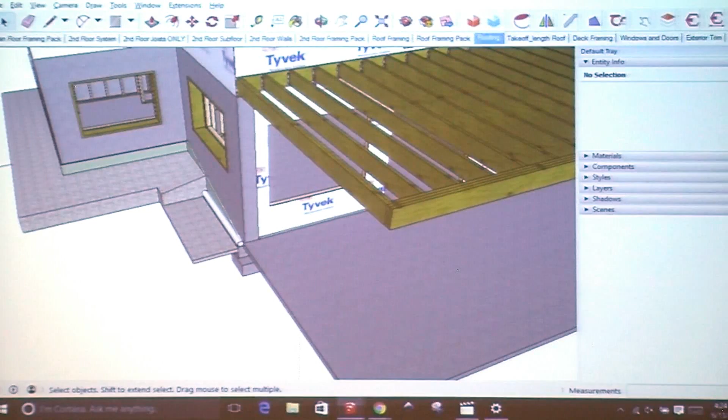So I do all my exterior trim inside that group again. If you want to see it more in an actual model, in this model there's the exterior trim as I'm flying around.

So it's all my fascia. I use actual pieces of 1x12 that I'm cutting it out of, and I trim it all to fit. There's my frieze board, my soffits - it's exactly the way I'm going to build it. All my corner boards, and the difference at the end of the day is I'm getting my quantities out of that.

After I do my trim, I do my siding. For the siding, I'm just creating a face. I'll trace inside those corner boards and up along the frieze board until I create a face, then take my rectangle tool and go from corner to corner of my trim to create that new face, and delete that face. Most of the time I have to cut the windows off to do that because the window is sticking out, so you end up clicking on the window instead of that face.

But since the windows are on a layer, it's a simple checkbox. So I'll create the face, cut the windows out, delete those faces, and then use push-pull. I pull it out a half inch - you can make it whatever you want, I just want to give it some depth. Then I apply my siding texture as an image file to the outside face only, so we're not multiplying or getting double data.

One interesting thing - if you go up in that gable, let me pop up into one of the neat little uses of doing this with Estimator. If I'm with my client, everybody's into the old Hardie shake look, so up in the gables you want the Hardie shakes, and I've got lap siding over here. I've got pricing associated with those two textures, so if somebody says, well, I had lap siding in there, how much is it with the shakes? I can click, click, one other click, and see the price.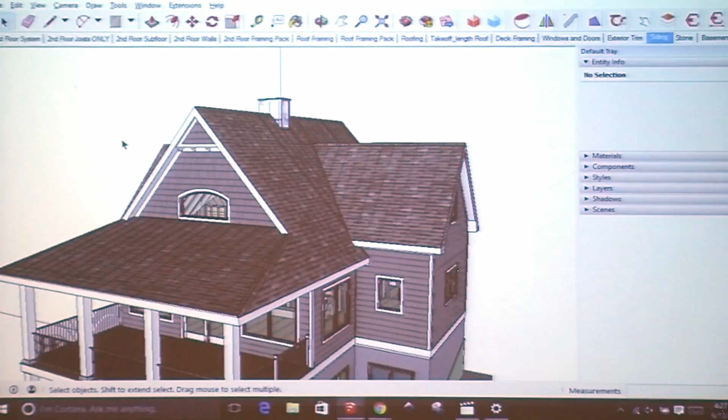I was talking about the return air grills. One time I had this woman I knew was not going to be happy with this return air grill in her foyer. So I modeled it - this is before I even started the house. I had this big old white register on the wall in her foyer because it had to be there, there was no other place to put it. So she sees that and goes, what is that?

That's your return air grill. Well, I don't want that. Well, you have to have that - it's the only place it can go. I could put it up here, but that would be right next to your kitchen, it'd look ugly. So okay, I get it. She understood then, instead of four months later when I'm building the house and she's pissed off. So it's a great way to manage your expectations.

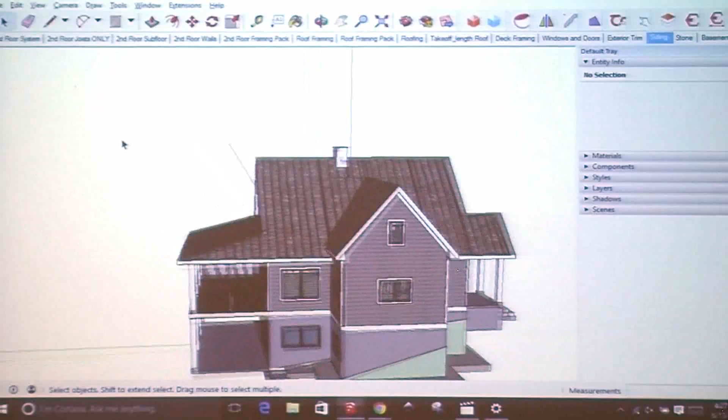Even a byproduct of modeling this house - and this is again a made-up house, I didn't build this for anybody - that front porch roof, let me show you my layers here of my gutters. So when I put gutters on the house right here, this is a pet peeve of mine as a builder. I've looked at this house for so long, I'm building this house, my clients have seen it. Then my gutter guys show up and they're putting downspouts wrapping around columns and doing all this other silly crap.

And then it no longer looks good, or God, I wish I'd have thought about that in advance. So now I model the gutters. I know that sounds silly, you don't have to do that, but I'll put those downspouts exactly where I want them, not any other place.

I'm a geek anyway, so I'll do a little flyby on their phone or iPad or whatever - you can sit there and spin the house around - and I'll just send them that. I'll text them and say, this is where the downspouts go. I don't want to drive all the way out there just to watch them put gutters up, or walk over there and say put a downspout here, let's walk around the corner, I want a downspout here. They're looking at the model now, and it takes all the guesswork out.

If I come out there and it's not right, they're going to fix it. But just a little simple thing of cool SketchUp stuff as we're designing in 3D - we see in 3D, right? I didn't have that shingled return across the front of there, I just had a band going there to separate the two. But when I went to put my downspouts on, I was like, I don't want to put it around that column - it's a pet peeve, I can't stand to see it wrapping around a column. And I didn't want it coming down on the front face of that wall.

So I thought, well, I'll just do a little shingle return over and then move the downspout off to the side. It's not a lot of water going in it. So that was a simple thing, just a result of putting gutters on the house - a design thing.

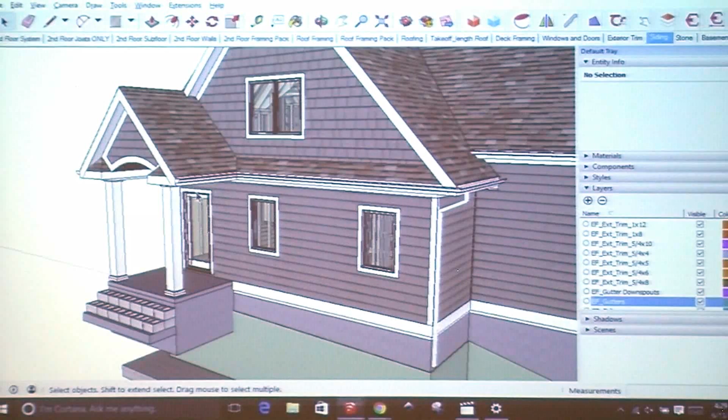Okay, so that talks about our siding there. The next thing I do is I put my stone veneer on, and you can see I take it down to my waterproofing.

When I showed you before using the assembly maker, I had that waterproofing going all the way up. But once I did that excavation and I knew where my grade was, I went back and edited that waterproofing. And then I paint it with this.

The waterproofing I use is they've got a green board that's an insulation board that they put on the surface. So I just use a little green texture, but I assign a price to that. So now I know how much my waterproofing is, and he doesn't even measure it anymore. He just says, how much am I billing you for? And I give him the square footage, and he can see it, so he knows it's accurate.

So the stone I'm doing the same way, okay? I'm just creating a face, pulling it out. Now the stone is really a little bit thicker than that band, but just for the sake of the model, I usually will pull it out, extrude it out until it flushes out with that band.

And then I go around and do that all the way around. This is a good case of using joint push-pull because I could do all those faces, select them all, pull them out the inch or inch and a half, whatever I want it to be. Then I use the texture tool to texture just that one face. Remember, I don't do the whole thing.

Yes, sir? What about flashing? Do you do flashing details? I usually do those in a 3D vignette to show them how I want it done. I don't model it. I could, I'm stupid enough to do that, or anal enough to do that. But for your contractors that are installing it, yes, I give them a 3D vignette. So in my working drawings, I've got a lot of little details that I give people.

So that's a Trex Reveal railing system. I also have a Trex Transcends railing system, and an interior one with a nice 6010 oak handrail with a big box newel post and wrought iron balusters with boots on the bottom. Those are components, and the others are profiles.

You can sit there and just draw around all you want. I do it a little differently because I order these in either 6 or 8 foot sections. So instead of going around the whole thing, I did the sides. I started with the post and told it every 6 feet, or no more than 6 feet - you can force it at 6 feet or say no more than 6 feet and it'll center it in the middle, which is good.

In that case, I drew that railing section from there to the other post, then deleted the post at the end. Then I go back and make those posts a component, price them, and make those railing sections individual components - calling it a 6 foot or 8 foot section, because that's how I'm ordering it.

If you're just doing visualization, just bing, bing, bing, bing, bing - who cares if there's a post inside of a post, unless it's a model issue. But I try to keep it clean so I'm pricing it properly.

So then the decking - all my composite decking. I did the same thing I did with Profile Builder. I went around the perimeter, and since I want to hang it past that band to give it a little reveal, like 3/4 of an inch, in Profile Builder I can say start 3/4 from the bottom left corner, then trace around and do my band, or my decking, around the perimeter.

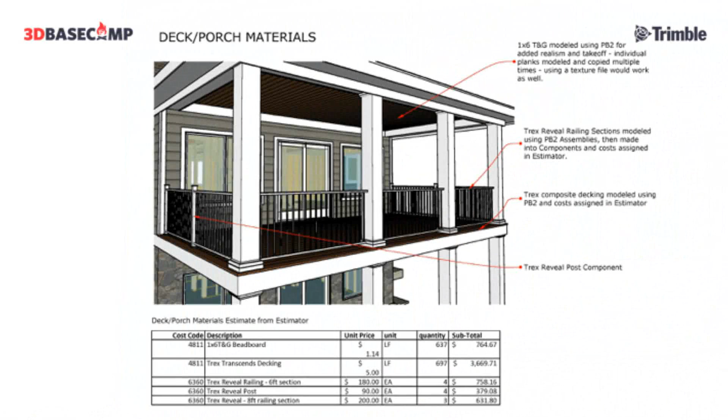And then when I get to that last board that's up against the house, I'll rip it. Okay, so that's the decks.

All right, mechanicals. With mechanicals, again, I work with my HVAC guy - this one I just made up. The point was I wanted to show that I try to work out where the return airs go. I don't spend a whole lot of time with mechanicals, it's more of an informational thing.

Electrical - somebody in the world of the warehouse created outlets and switches that are very realistic. When I render these things, they are spot on. All I did was add a little edge so it would snap to a stud, because I want it to snap into a stud just like my electrician's going to do. And I put a 2D symbol at the bottom.

That's on a layer for my electrical plan, so when I'm doing my construction docs, I cut off the 3D outlet and I've got my outlet symbol where it goes. If I move one, it moves in the drawings too. I use all my outlets and switches for a count, and I also give that count to my electrician - he charges me per count.

But I also get my 2D information out of it. Those can lights you're seeing have little weird flare things coming down—that's an IES light, a rendering light I use when I render in Thea. So that can light's got that light built into it as part of the component. When I pop into Thea and do a quick rendering for a client, they're looking at a photograph of their room with realistic looking light. So that's it for electrical.

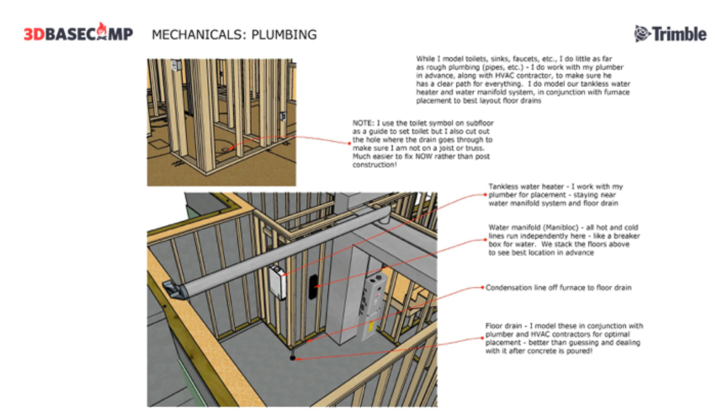With plumbing, again, I told you about cutting a hole for the toilet. So that's really it for the mechanicals.

Insulation—not only do I want to show my people what that's going to look like, I need my pricing information. The pink insulation you're seeing is up against furred walls. I don't usually use pink insulation, I use foam in my market, but where I'm building a 2x4 wall against a concrete wall, I just use batts. So all I did was create a face, put that pink texture on it at 53 cents a square foot or whatever, and moved it back a half inch so it wasn't flush with the studs. Then I put all that into a group.

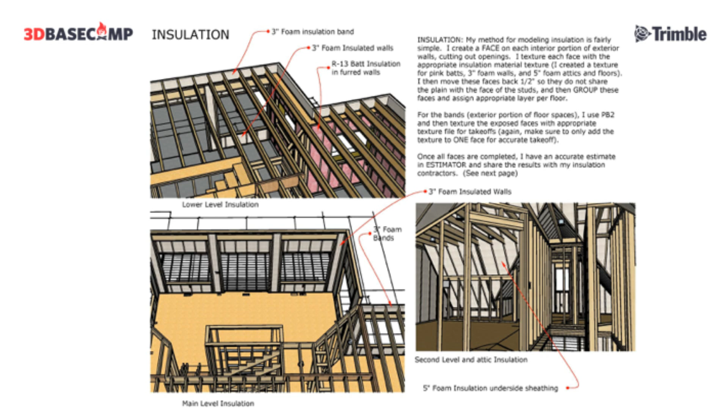The foam insulation was done the same way, just with a different price and texture. The band you see going around there I did using Profile Builder because it was quick—I traced around the whole thing, then textured one face to get my quantities. Same thing up in the roof: I created that face for the underside of the rafters and pushed it up in there, but I use a 5-inch foam texture for that because it's a different price.

So when I'm all said and done, that's what all the insulation looks like, the whole envelope. The blue is the backside, the reversed face. Inside of that is all that color stuff you can see. I can select all that and tell my insulator here's how much it should cost—he doesn't have to get out there and measure everything.

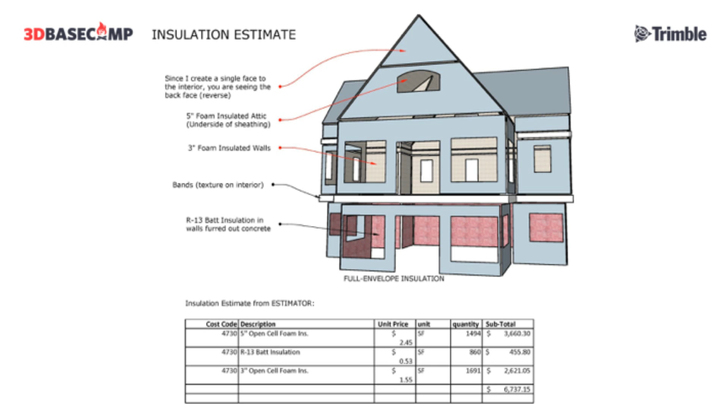All right, drywall. All I do, if it's a rectangular room, is go down on the floor from plate to plate and draw a rectangle. I'll use the F command, offset a half inch, delete the face created on the inside, pull that half-inch strip up to within a half inch of the ceiling, triple click on it, make it a group, and clean out the doors and windows.

It doesn't take long to do, but then I'll texture the backside with a material file I use called Drywall 48, something I made because I have 48-inch boards and 54-inch boards—two different textures. If it's a 9-foot wall, I'll texture the backside with the one called 54 because it gives me 54-inch boards in my count. So I'll paint the backside with that texture to get my quantities, but I'll paint the inside whatever color, because if the client wants to see it in pink, they can see it in pink. It's not going to affect my quantities.

For the ceilings, I just trace right over top, pull it up that half inch, and then I usually do a grid for my ceiling. I don't cut out holes for outlets and switches—I'm not that bad. But I do cut out holes for the can lights: I create a nice little grid, punch a hole right through it, then take my can light, which has a little reference point, and snap it right to that grid and hug the ceiling with it. When it's all said and done, I've got all my drywall board count, and this really helps me with my estimate with my vendors.

Flooring, for you interior people—I just trace around the perimeter just like I did with the slabs. I've got my hardwood flooring, my tile, and my carpet, and then I can price that either on a layer basis or on a material basis.

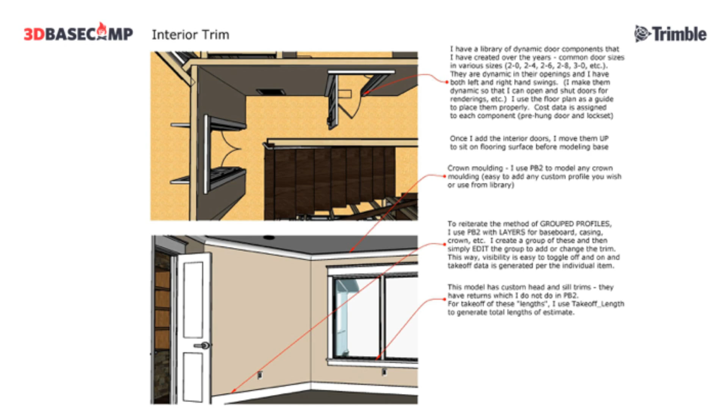Then I get them moved up on top of the floor, because I do all my trim on top of the floor. So the baseboard, window trim, crown molding, all that was done within that lineal group we talked about using Profile Builder, because then I get my lengths. You don't have to use that. You can use the Follow Me tool, but that's just what I prefer to do to save time.

Cabinetry, I typically get a quote from my cabinet guys. They typically do the design, and then they send it to me, and I clean it up, and then bring it into my model. But I'll just assign the total price of that as the quote.

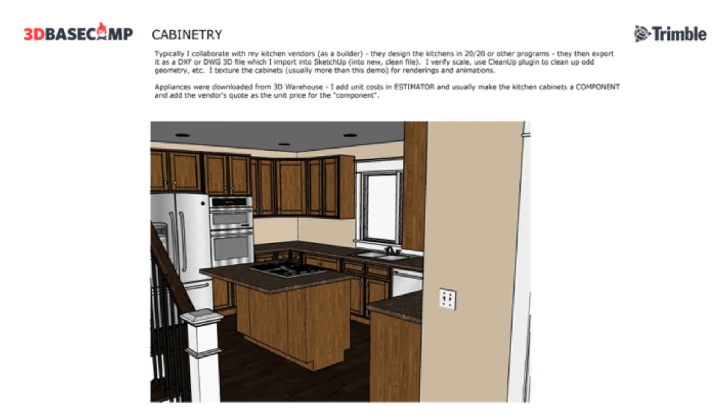Appliances, I got off the 3D Warehouse and assigned a price to them. Same for sinks, plumbing, and everything else. Bath finishes, for instance, I got that Kohler toilet off the warehouse, towel bar, toilet paper holders, faucets, sinks, all that came off the warehouse. And then I just find ones that I like, that I use in all my models, and assign pricing to it so that the next time I need one and I drag it over in the model, I don't have to go through pricing it, unless I need to change the price.

All right, the final site model. What you're seeing floating up above is the 2D work, the faces that I created down on the 2D site. So I literally drew my mulch beds. That one you see going around the house was the mulch beds around the house. There's a pathway that goes down to the dock. In this case, it might be gravel or concrete, whatever you want to make it. And then the driveway face.

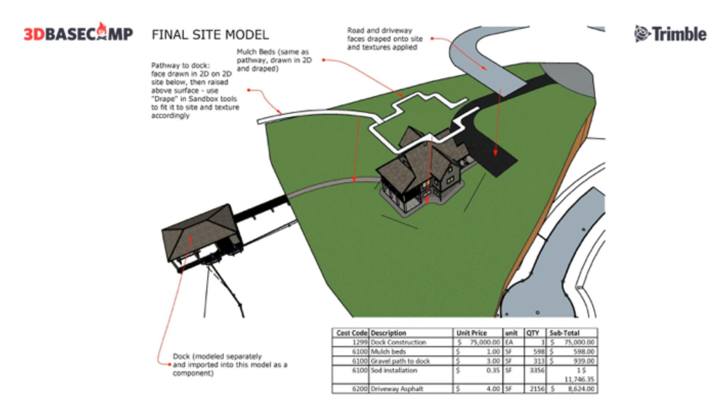So I pulled those things up above that two-dimensional final site and hit drape on the sandbox tools. And it plops those things down, it cuts that surface out and lets you texture it differently. So I use asphalt texture, mulch texture, and then when I click on that face, I got my mulch quantities, my sod, and my driveway very accurately priced.

So that's really from start to finish. I know it's a lot of stuff I threw at you. If you go to my Facebook page, I just posted it this morning. There's a link to a box.com link that you can download this model. It's 90 megabytes, so it might take you a little while, but it's loaded with stuff. There's even a dock on there with a jet ski lift, and all kinds of cool stuff. But all those components that you saw are in there, so it might save you some time.

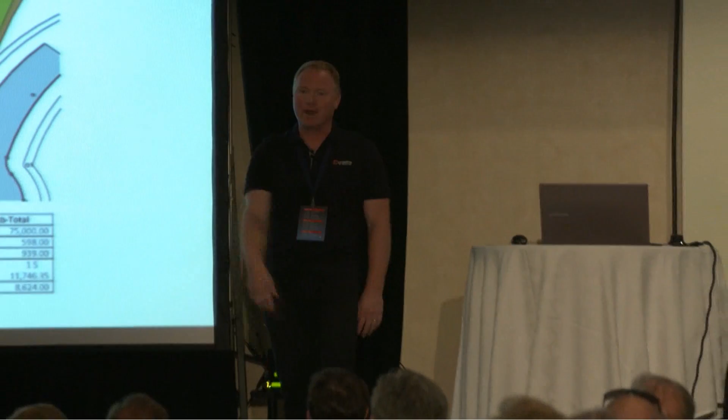So you've done this a lot? I've probably done, to this level of detail, 12 or 15. Several of them a year, if not more, and starting to do visualization for other people. That's really what I want to start doing, is be a back office to architects and other people anywhere, because then I could work for anybody from anywhere. And I'm 51 years old, getting ready to be a grandfather, so I'm ready to do something different. Thank you very much, folks.